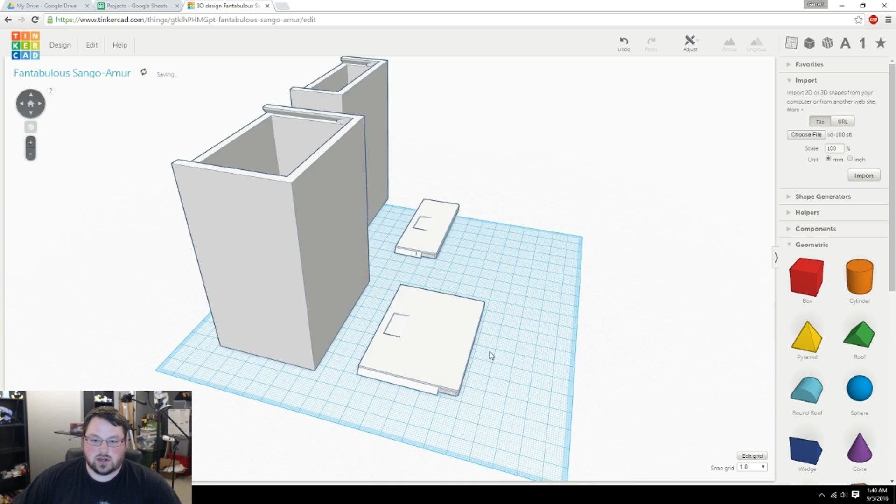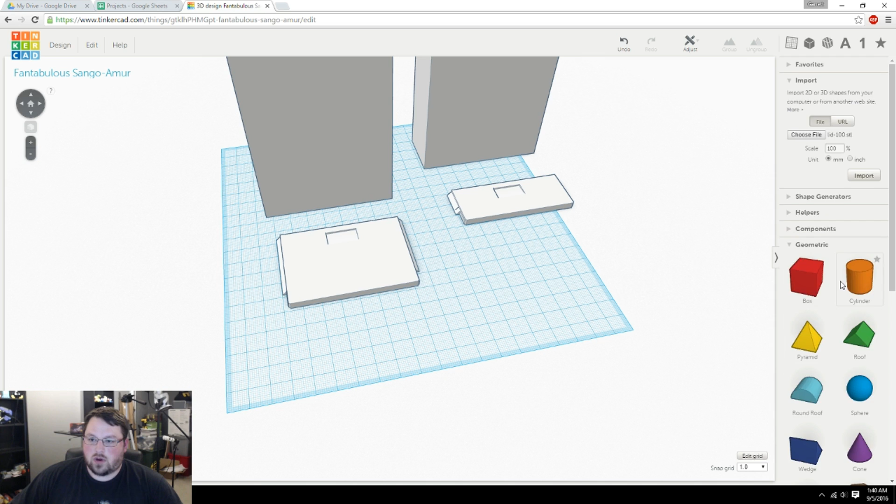So the first thing is, you'll notice that these walls are decently thick. I made them 4 millimeters thick all the way around, so you can put designs in them and anything you want. If you want to engrave them or extrude them, I think 1 millimeter would probably do for most of them. And I think actually for this one, I'm going to put my name right up here. So I'll come down here to letters, and first thing, I'll just drag out all the letters I need for my name.

Okay, so now you can see those are kind of all over the place. I am just going to scoot the A and the G closer together. And then if I select all of them, and then go adjust, align, and then I can click this right here, and it will center all of them together. And now I could go in and size these out perfectly, but I'm just going to eyeball it real quick.

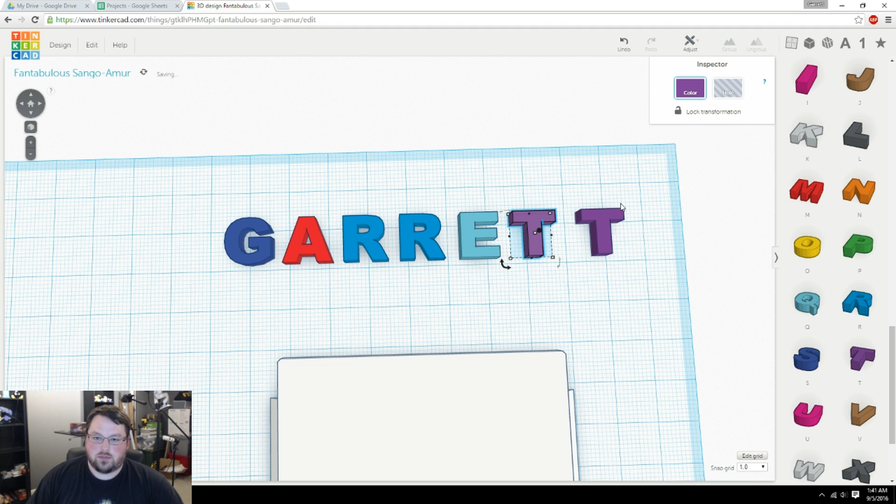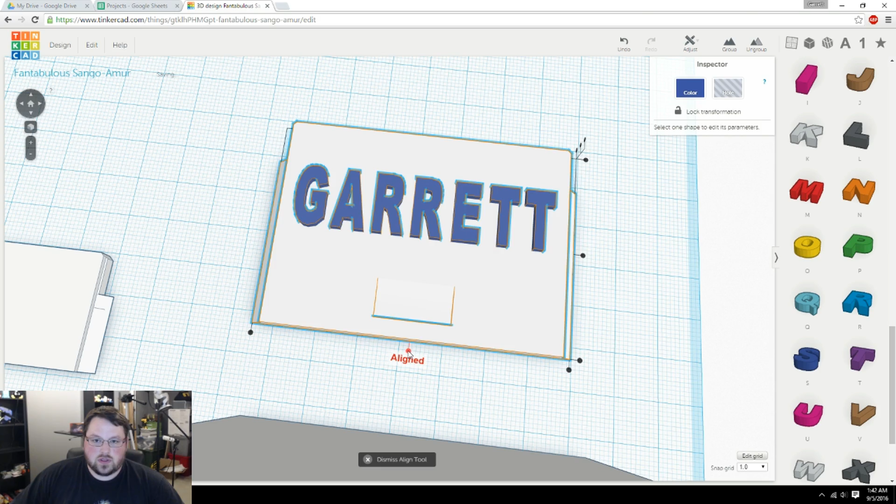So then I will just select all of these, and I'm actually going to group them together. Then I will drag it down, and just do whatever you want to make it fit here. And then if you want to make this line up too, you can do the same thing with align and adjust. And then do this one right here so it's perfectly centered. Okay, so there I've got it just protruding out 1 millimeter. And then you can group and print it just like that.

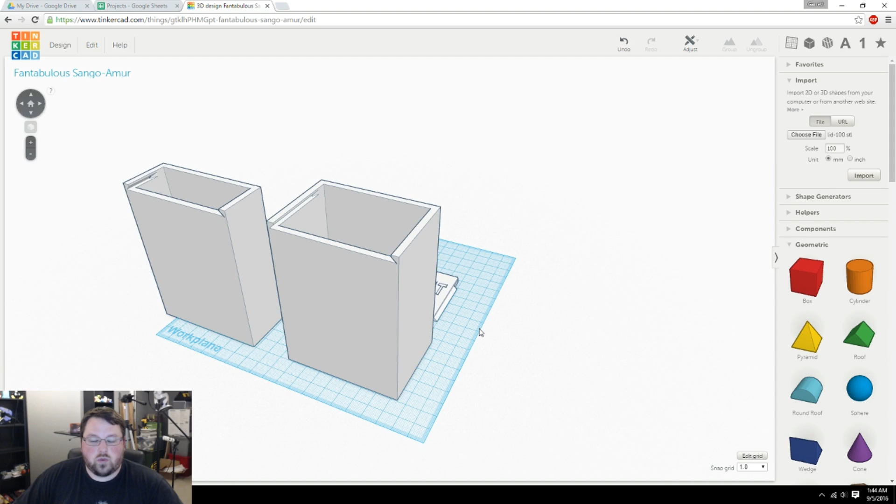And now, boom, you've got a deck box with your name extruded from it. If you wanted to, you could also select your name, make it a hole, and group it as well. And then you have it kind of chiseled in there. And now I'll show you one other cool technique, and I actually have a full video about this.

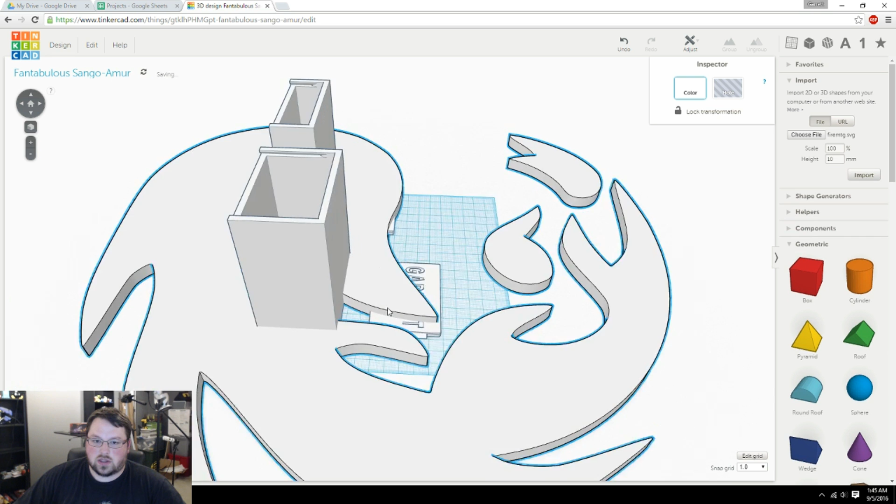It's basically explaining how to take a 2D image and turn it into a 3D object for use in Tinkercad. You see here that it is a .svg file, and I think they usually import pretty big, but we'll see. Yeah, that's huge, but that's all right. We can just scale it down. I'll hold shift, scale down.

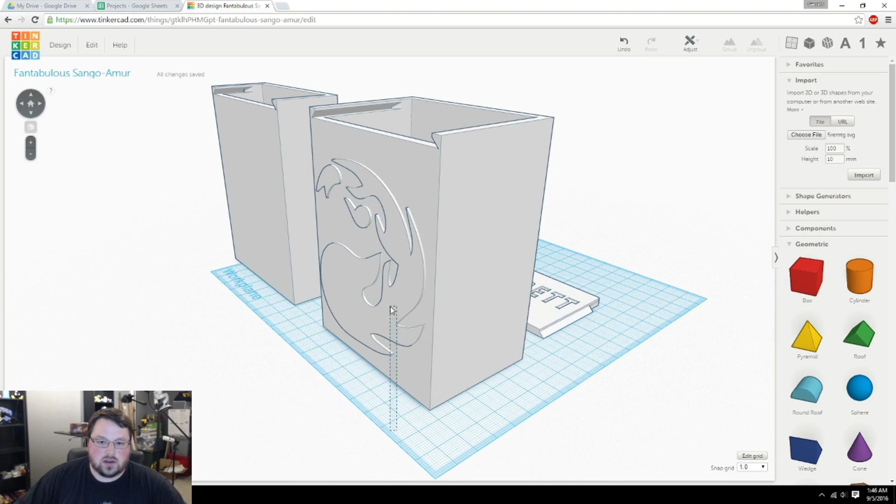And then I'm actually going to put it right on the front of this box, because that looks pretty cool. And with it raised out like this, it'd be pretty easy to paint as well. So if I just do that, and then I can do this and group it, then I can print this out and that design will be on there.

And likewise with the name, I can do the same thing and make this a hole instead, group, and then it'll be etched on the inside, just whatever you want there. So I thought this was something that was pretty cool if you or a friend you know has a need for a deck box or plays TCGs, anything like that. Something that's custom like this can be really fun.

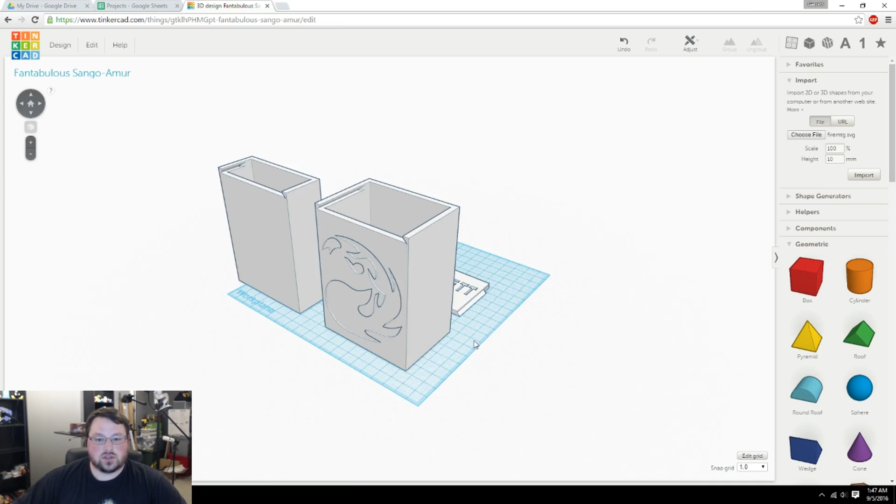And now normally this is where we'd be putting it on the shelves behind me, but I don't really have a permanent place for my cards just yet, so I'm not going to put them up there yet, and I think I'm actually going to print some custom ones. And I will probably be releasing variations. If I come up with something cool, I might design something on here, print it, have my wife paint it and everything to make really cool deck boxes, and I will of course release the files for those. So if this video goes over well, I will definitely be doing more things like this in the future.